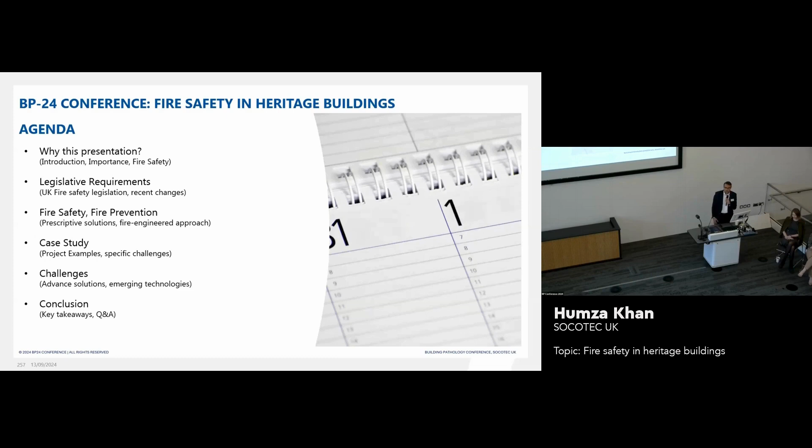So today's presentation is about fire safety in heritage buildings, the importance of these buildings in our socio-economic environment, the legislative requirements of the UK government, and how we meet those legislative requirements based on the recommendations of the fire safety guidance. And then I will present some case studies where our fire engineering team faced some challenges and how we came up with unconventional methods of achieving the objectives of fire safety, what are the usual challenges in implementation of the fire strategy in a real life building, and the conclusion, key takeaways from this presentation.

Heritage buildings are not just buildings made up of brick or stones, but they carry an immense cultural and heritage value because of the history they have been through. Especially in the UK, these buildings are not only museums or castles, but they are playing an immense role in the country's national infrastructure, consisting of universities, theatre buildings, council buildings, and everything else.

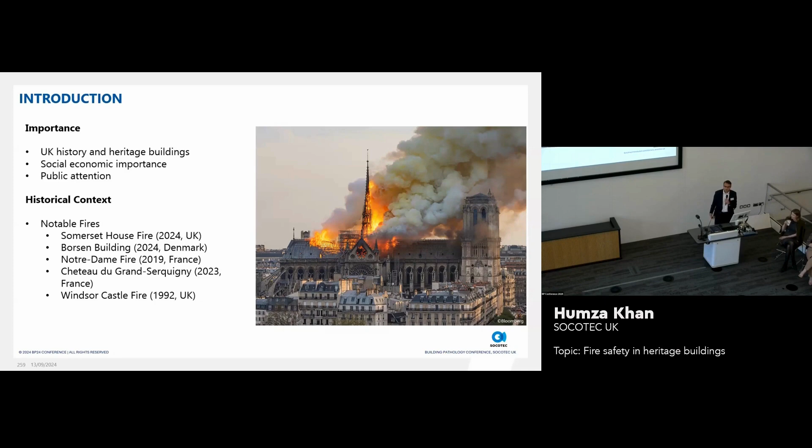But we have seen in the history that these buildings are more vulnerable to fire as compared to new build structures. For example, last month's fire in Somerset House in London, the Borsen building fire earlier this year, and the Notre Dame fire we are all aware about. But there are some fires that go unnoticed in these buildings.

So the definition of a heritage building is that it is a cultural or historical structure of immense architectural or cultural value, which is legally protected under Section 1 of the Planning Act 1990. And the National Heritage List for England mentions that there are more than 370,000 entries for listed buildings categorized into three categories based on their importance: exceptional interest, special interest, and more than special interest.

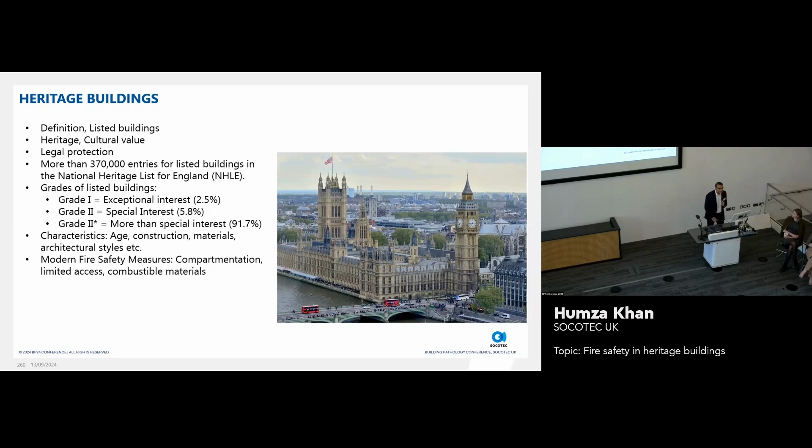All these structures have unique characteristics such as the age, construction, the materials they are made up of, and the architectural style, which is not always easy to comply with the modern fire safety methods of compartmentation, the limitations on the means of access, and the limitations on the combustibility of materials.

So we have talked a lot about the new legislations and regulations on fire safety. But I will just talk about the primary ones, which are the Building Act 1984 and the secondary legislation, which translates into the building regulations. And in order to meet the requirements of these regulations, we take guidance from the prescriptive standards, such as British Standards or Approved Documents. However, these guidance documents get updated only once or twice in a decade.

So there are some special interest groups, such as in the Institution of Fire Engineers, who come up with more up-to-date guidance on these structures.

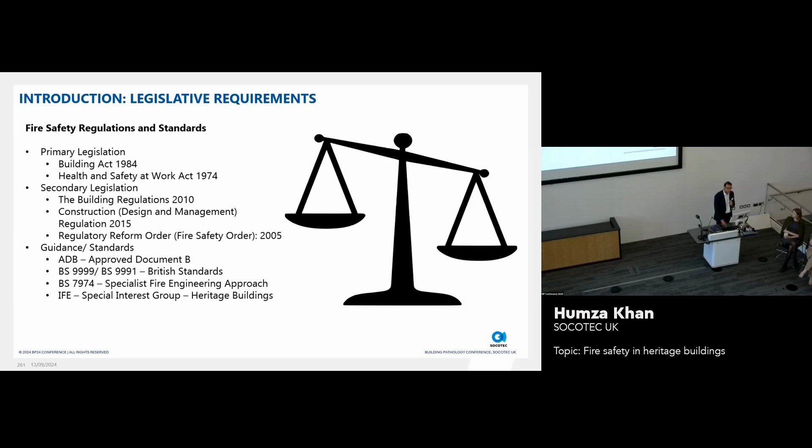Fire safety in heritage buildings is of critical importance because the design of these buildings has some inherent risks, such as the building fabric could be made up of combustible materials, the presence of chimneys, or the wooden panelling or textiles within these structures, which are not easy to remove. So we would lose compliance with the definition of sustainability, which is that we have to pass on these structures to our future generation as we have received them from our ancestors.

There could be electrical systems from the previous century which could be outdated, and extensive cavities, presenting a risk of fire through these structures. The existing design may not always comply with the compartmentation and the requirements for the structural elements. The lack of ventilation system: they do have ventilation systems in older and historical buildings, but not like the smoke ventilation systems we propose in newer builds. The limitations on travel distances and the access for firefighters to go into the building and fight fire in the event it happens.

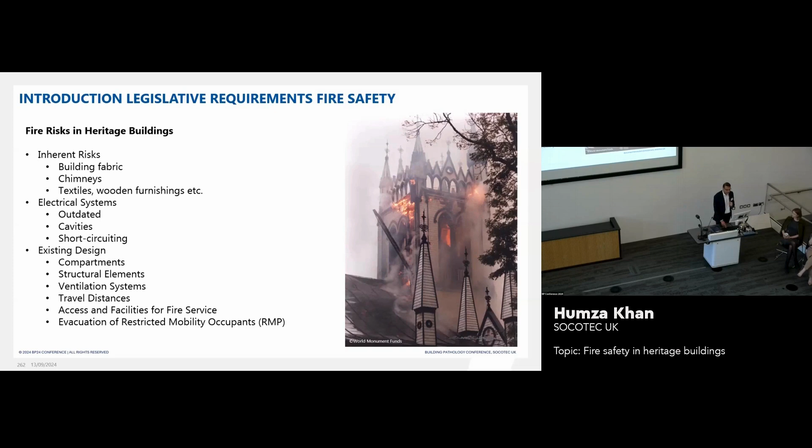When we look at the fire strategy of these buildings in our company, we always try to approach it comprehensively through the similar methods like we do it in a new build, for example, defining the occupancy of the building and how to limit the use of different spaces.

We do have recommendations for the active and passive fire safety measures, which could be the fire detection and alarm system in order to alert people who are in the building, and the ventilation, the fire separation of different areas, the fire doors, which are of critical importance.

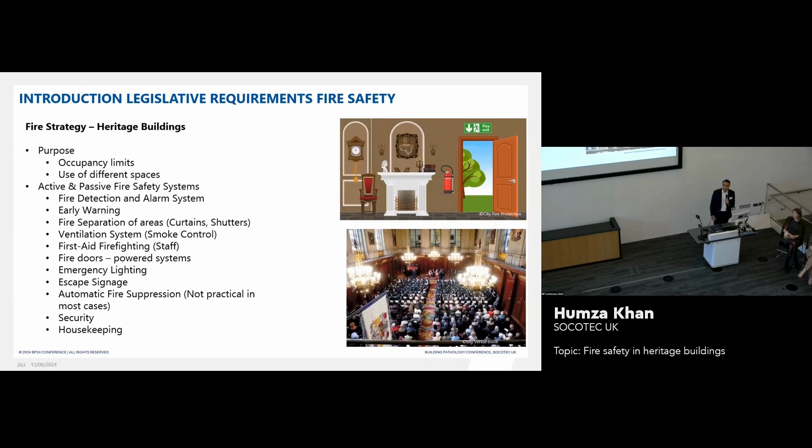The installation of automatic fire suppression systems is easier in the new build, but not in the existing ones, so not always practical to achieve. And if it's a communal building, then there are some measures for the security and housekeeping.

The critical thing about means of escape is that all the occupants in the building need to feel safe in an event of fire, and they can make an escape without getting stuck in the building. So we do mention the travel distances and exit capacity as we do in the new structures, but there are some limitations. So we'll talk about them later.

With the introduction of London Plan Policy 2021, there is a criteria for inclusive design, which mentions that all the people with reduced mobility should be able to evacuate without feeling differentiated from the other occupants of the building. So that is something to look for in these structures. The Access for All scheme in heritage railway structures, this is something to look into and implement in the fire strategy.

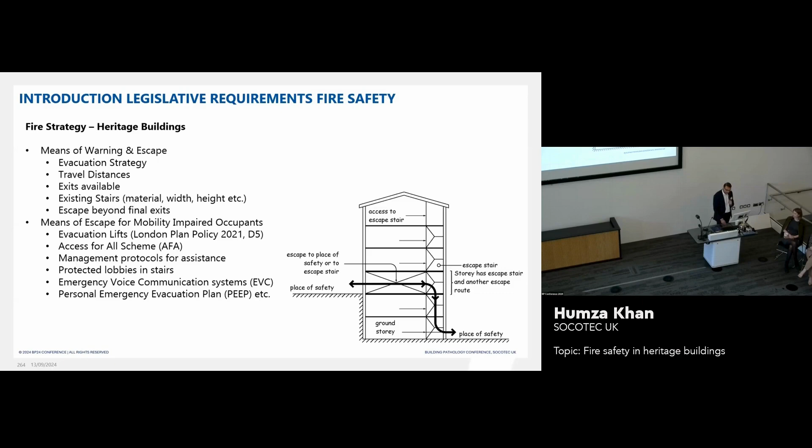So we have a limitation on the internal fire spread, limitation on the internal linings of the building, because the delicate structures and the materials of the building may not always be easy to replace, because they carry a cultural and heritage value. Similarly, the structural elements like columns or beams might have architectural features that are not easy to replace.

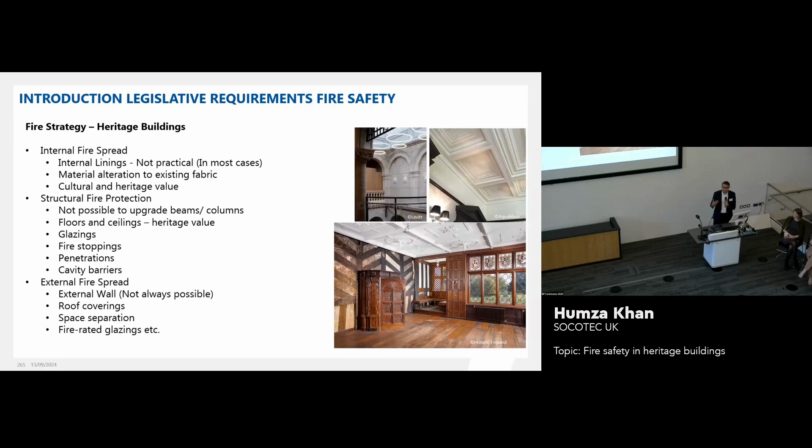The limitations on external fire spread: we have often found that these buildings are located in the congested urban environment, and there are limitations on the space separation between different buildings, which the modern fire safety guidance does mention and put some restrictions, but in the heritage buildings, it's not always easy to achieve.

So for example, the use of water for fighting a fire within these buildings is not always practical, because it will damage the internal fabric of the building and may not always be helpful in the firefighting methods.

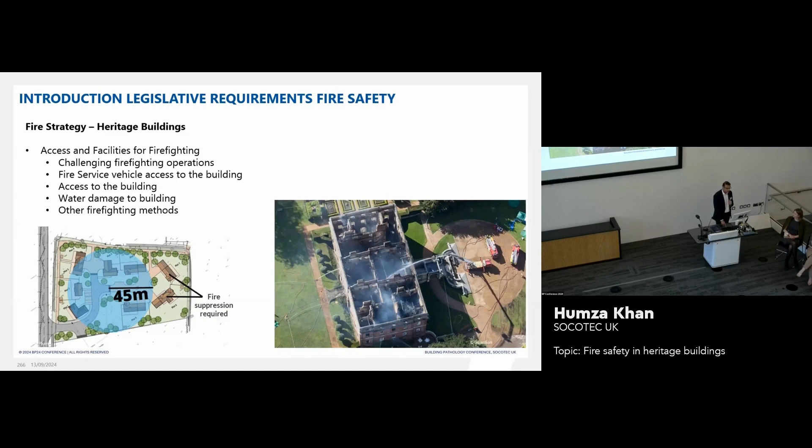So I will start with the first case study where SOCOTEC Fire Engineering team worked on the Theatre Royal at Drury Lane in London. It is a Grade 1 listed theatre building, operational since 1812, a 6-storey building with a basement, and it has a back of house office accommodation, which the client wanted to convert into a restaurant space which can accommodate around 300 to 400 occupants.

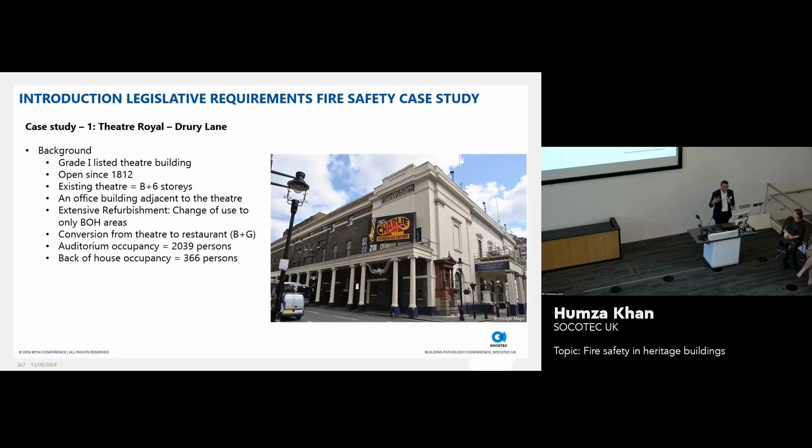So the total occupancy of the auditorium is itself about 2,000 people, and adding 300 more people into the back of the building is kind of a fire safety challenge to counter for.

And there were some unique challenges related with the fire detection, because the conventional fire detection was only based on the smoke detection, not always possible if there is some sort of a performance going on the stage which has smoke itself. Heat detection might not always be possible because there are some fireworks on the stage.

The width of the existing doors was not enough to accommodate all the occupants in a building like this. There were extended travel distances, and the 3 stairs which were providing access to all the upper galleries for the occupants were very close together and not lobby protected from the other areas. So we had to discount these and then calculate the overall occupancy of the building.

Now the fire doors over time were distorted, not fit for their function, and there were no firefighting shafts or smoke ventilation in the basement.

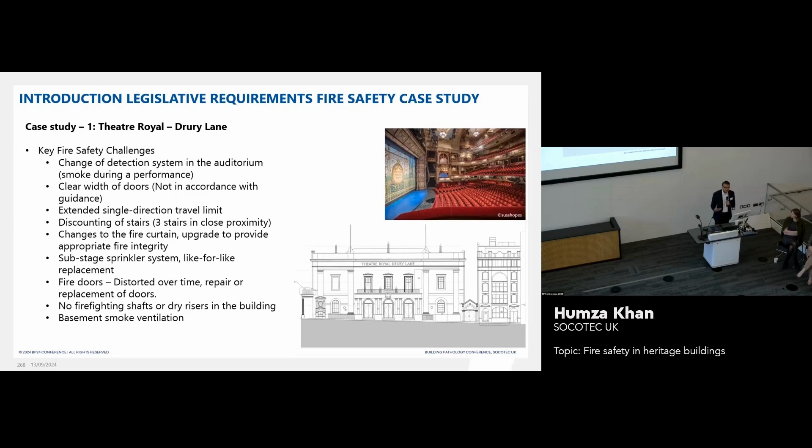Now, a very similar structure, a theatre building called the Iroquois Theater, was burned down in the US in around 1903, which had the occupancy of almost 2,000 occupants. And during the fire, almost 600 people died. So just not to repeat the same outcome of history, we had to implement unique fire safety methods.

So our key recommendation was, first of all, to upgrade the fire detection system, introduce a multi-criteria detection, which not only looks at the smoke or heat, but also at the flame and the growth of fire within a specific period of time. The extended travel distances were justified based on the increased height of the ceiling. The discounting of stairs could not be made better, but we did not make it worse than the existing condition.

Lobby protection was recommended and achieved in the back of house and auditorium areas. Refuge points were introduced. The existing structural fire resistance was unknown because of a lack of design documentation on this structure, but according to the new guidance requirement, the structure should be able to achieve 60 minutes of fire rating in the event of fire.

So the basement without smoke ventilation was proposed to provide more compartmentation so that the fire remains within the basement and does not spread throughout the structure.

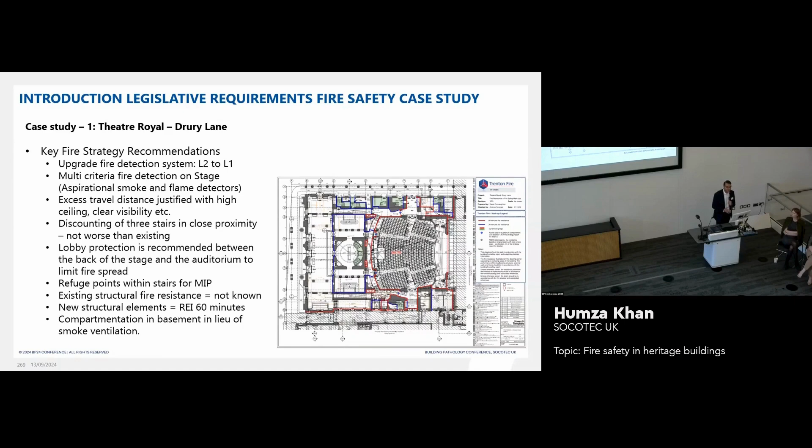The second case study is about Lancaster Gate in London, which was proposed to be converted from a hotel use into a residential development. The number of dwellings in this building was going to be reduced, and Regulation 5 of the building regulations mentions that even with reducing the number of flats or dwellings, it comes under the material change of use definition, and the whole building needs to achieve the highest possible standard of fire safety,

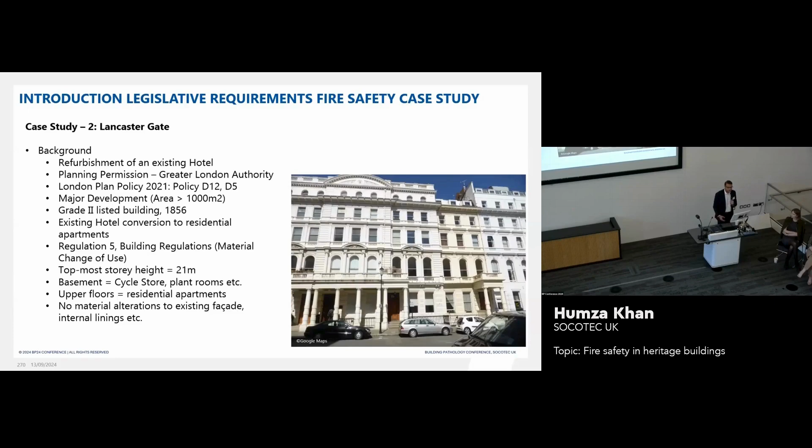as also mentioned in London Plan Policy 2021. The topmost story was 21 meters, more than 11 meters, so we had to introduce sprinklers in the building. The basement was reserved for the plant rooms and cycle stores, which were not lobby protected in this case and had to be separated from the stairs, so that in the event of a fire, which could be due to negligence or arson, the smoke does not go into the stairs and leave all the building occupants in their apartments. The main objective was also to keep the facade of the building untouched. So that was the limitation.

The key fire safety challenges, as mentioned, were the inclusive design and the presence of no evacuation lift. We had to introduce an evacuation lift within the building, and the automatic fire detection system was upgraded so that all the occupants can stay within their apartment in the event of fire. The introduction of a lobby between the stair core and the cycle store was done in this project.

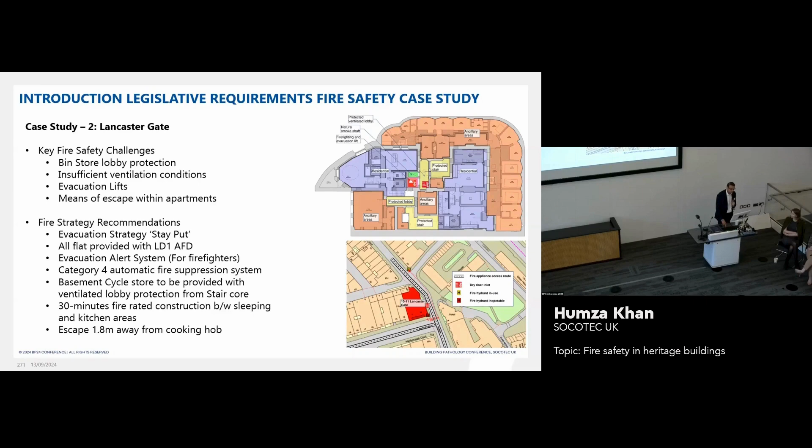The third and last case study is about 84 Moorgate in London. It's called Electra House, and the proposal was to convert this building from a university accommodation into an office accommodation. It had an unconventional layout, a very massive building with 2 basement stories, and the height of the occupied floor was almost 26 meters. There were excess travel distances, and the stairs were all serving the basement, which would not be possible in a new build structure.

However, this was a heritage structure, so we had to adapt and not make the existing conditions worse. No firefighting shafts or dry risers were present, but there was a proposal for the introduction of an openable vent within the central stair, so that in the event of fire, the smoke that goes into the stair can go out of the building through the window or vents.

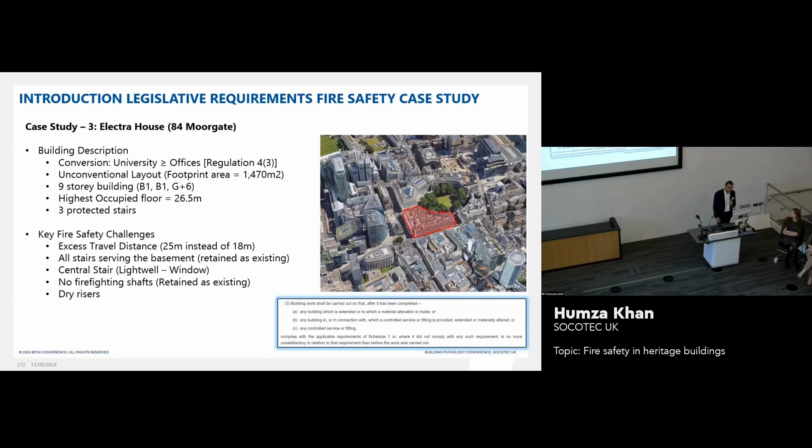So these are the challenges to fire safety and fire strategy development, but there are some challenges during the implementation of these recommendations. For example, we have 2 conflicting objectives here. First, we want to preserve the building and its existing features. And the second objective is that we want to make sure that everyone who is in the building is safe and can get out in the event of fire. So we have to go for a balanced approach.

There's also a conflicting interest between the funding and the resources. If an existing building is taking so much resources, economic backing, and money for regular maintenance, then wouldn't it be more useful to build a new structure with state-of-the-art fire safety systems? And then there are some construction complexities with the methods of construction, the damage during construction, and the specific skill set required to restore these buildings, which is, of course, not always the cheapest possible option.

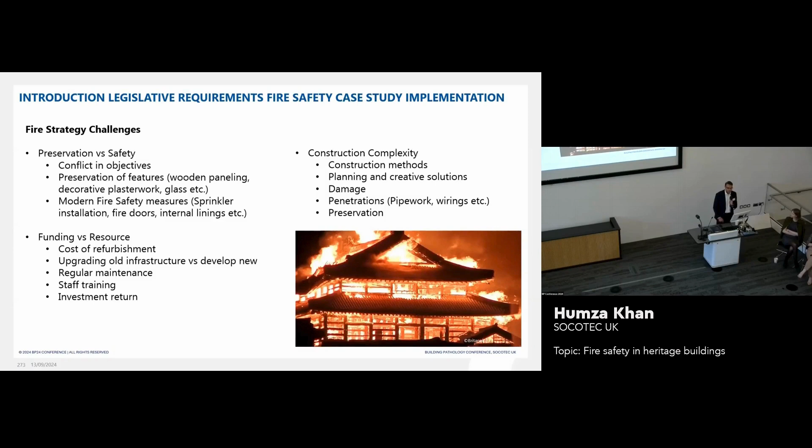However, there are some future directions and innovations, emerging technologies that could be helpful in improving the fire safety of these buildings. For example, comprehensive building information models with additional layers of detail for the fire engineers to work on and collaborate with different departments so that the overall fire safety could be improved.

The real-time monitoring of the information present within the building and feeding this into online systems so that we can look at the data retrospectively to find out what factors are contributing to the fire safety of these buildings, and maybe further research around thermal imaging for the location and identification of hotspots within the building where the fire load is, and how we can fight the fire in case it happens, not just with water, but with some innovative methods of extinguishing it.

There could be invisible coatings applied to the existing features so that they are not very combustible and not at high risk of catching fire.

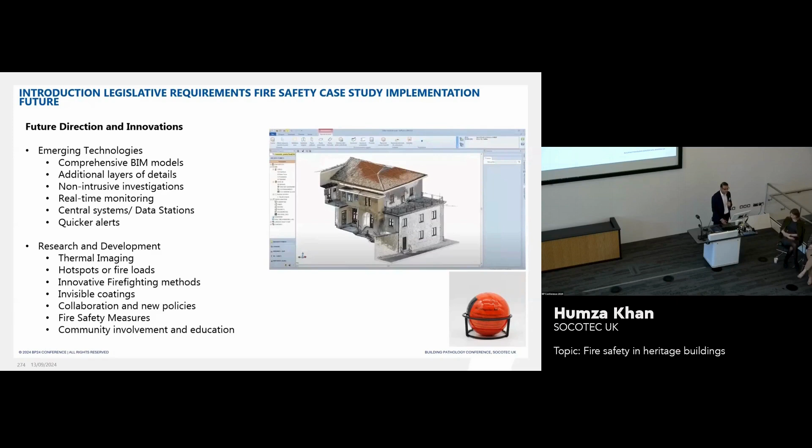And of course, there is a need for collaboration and new policies that need to be developed for the safety of these buildings, and a need for community involvement and education among all stakeholders to achieve the fire safety objectives.

So the conclusion and key takeaways from this presentation is that we have to go for a balanced approach between preservation and fire safety, because these are not just structures, they carry immense cultural and heritage value. We have to comply with the regulatory framework, the legal requirements in these structures, and ensure that the public using these buildings is safe.

The fire safety challenges are comprehensive and sensitive, and our objective is to not make them worse than existing, and to pass these structures to our future generations as we received them from our past.

Socioeconomic challenges related to funding and revenue, the complexity of construction, and the need for all stakeholders to sit together and find a solution to meet the objectives of fire safety in these buildings.

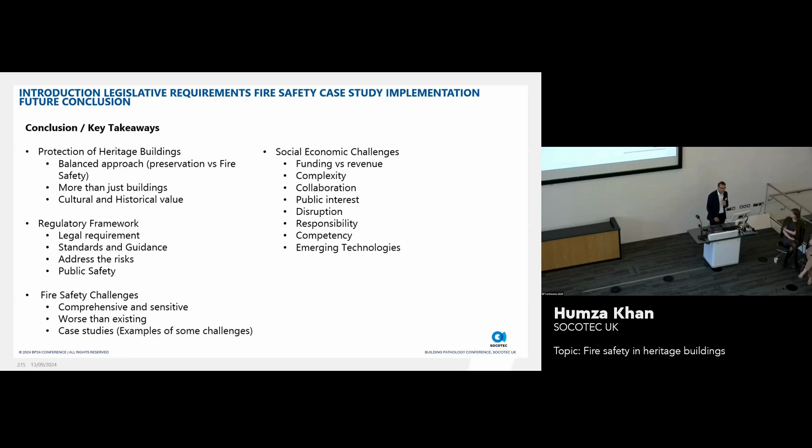The disruption of services, what is in the public interest, whether to spend so much money on restoration of these structures, and of course there is a requirement for responsibility and competency. This can be sorted out with the help of innovation and emerging technologies in the future.

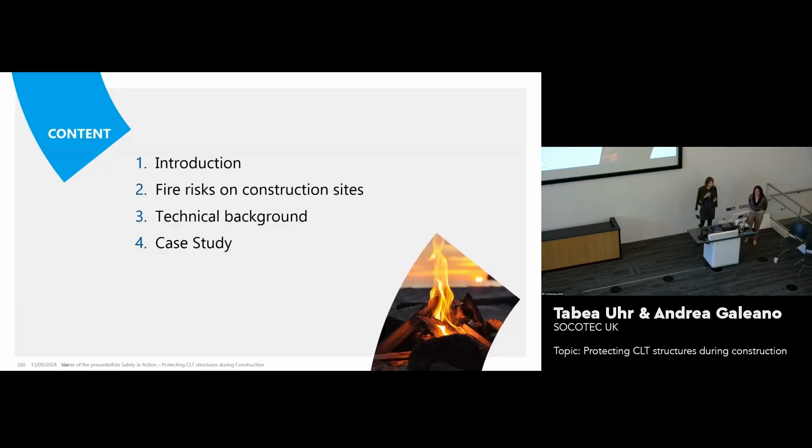So looking at the introduction, I hope everyone now understands from Humza's presentation that with fire safety engineering specifically, we're looking at the prevention, the control, and the management of fires. That means specifically the safeguarding of life, but also property protection, business continuity, and the impact of all of that.

And then obviously during the construction site, we're focusing specifically on that maybe 1, 2, but also maybe 10-year gap for when the building is being developed.

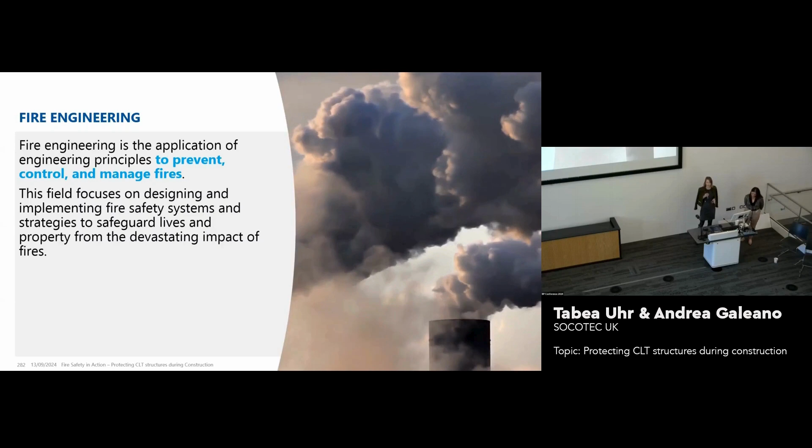Now, obviously, we heard that before - the current construction industry is a very high percentage of the pollution that is currently generated. I found a number of about 37%. You guys might know better than me if that's roughly correct, but let's go with about a third of the global emissions originate from construction and the build industry.

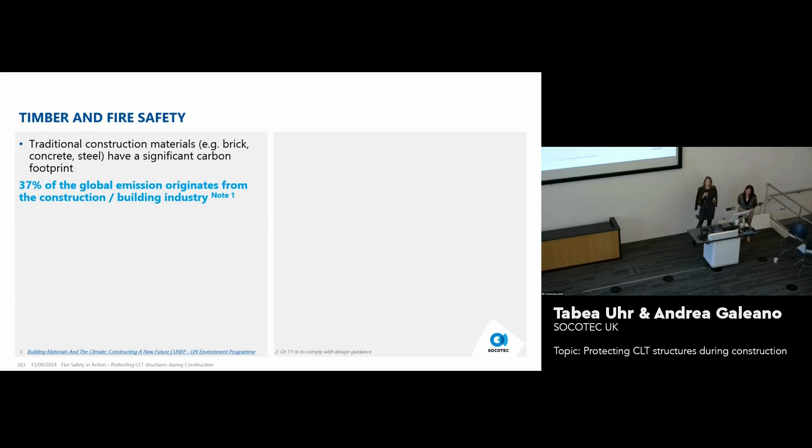So looking at CLT and timber construction as a renewable construction material is a very good way that we as an industry want to go. And especially when you combine these with modular structures or prefabrication, you can very efficiently start to build your buildings.

But looking at it from a fire safety point of view, your timber, your CLT is a combustible material. It's going to participate in your fire event and make that worse. We need to comply with the specifications that Humza explained just now.

We're looking at linings, the structural fire resistance of timber, which will burn eventually, and its combustibility. Picking up from an earlier presentation about the Grenfell Tower fire, we're still picking this up, the results and impacts of this fire where 72 people died. We're still working on this.

One of the biggest impacts the inquiry had on our industry was the removal of all combustible materials from the facade of residential buildings over 18 meters. It's a huge impact for us because now when we want to build with CLT and timber and we want to move there, this is a big limitation for us in England and not something we can move or overcome at the moment, given the impact that Grenfell had on us.

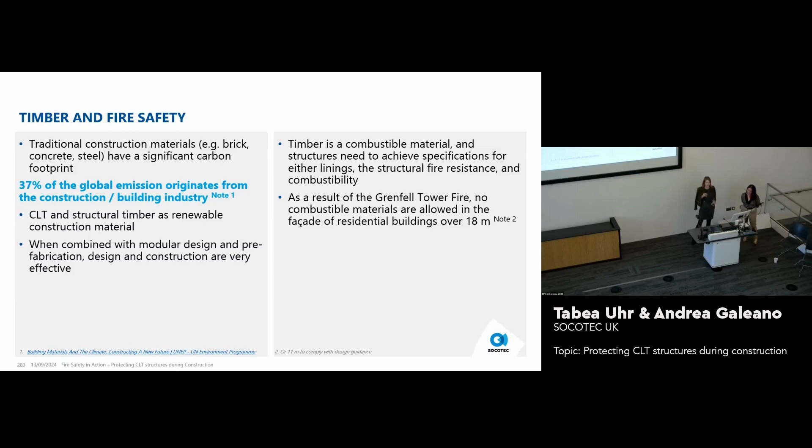So as an industry we're now heading more towards low and mid-rise non-residential buildings where those limitations are not in place, and now looking to use structural timber and CLT in these sort of buildings.

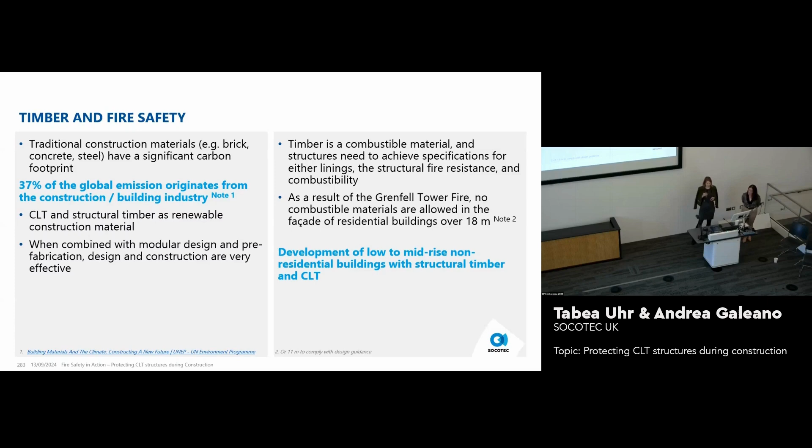They also looked at water mist, so a water mist suppression system that would create a voluminous mist throughout the building to then suppress the fire.

What they found in this fire test specifically was that there's a lot of radiation happening between your combustible materials, so your chairs, your tables, etc., and then your CLT ceilings, kind of radiating and propagating that fire spread throughout your compartment, especially when you have very large compartments.

But they also found that even just a partial encapsulation with protective materials such as a plasterboard, a cement board, or these type of things can significantly slow the spread of fire. Water mist systems or other suppression systems as well help with cooling, extinguishing, and these type of effects. So the problem now that we face on our construction sites is partial encapsulation, full encapsulation, water mist systems.

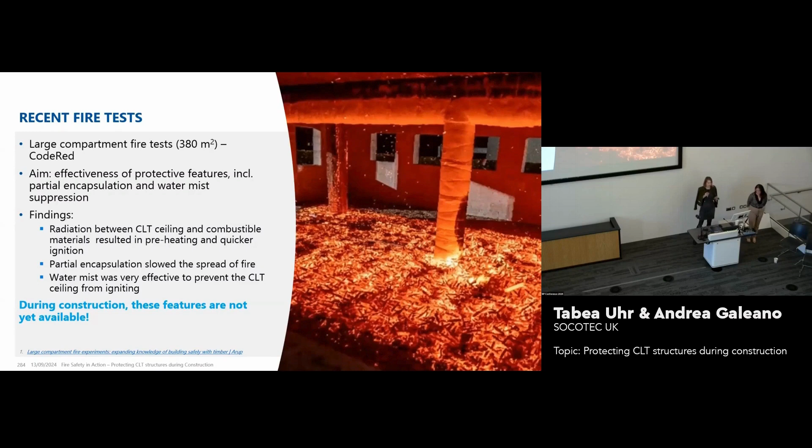We're just about to build them. They're not here yet. So in most cases, we're looking at unprotected timber. We're not here yet. And some of those risks will now be explained by Andrea.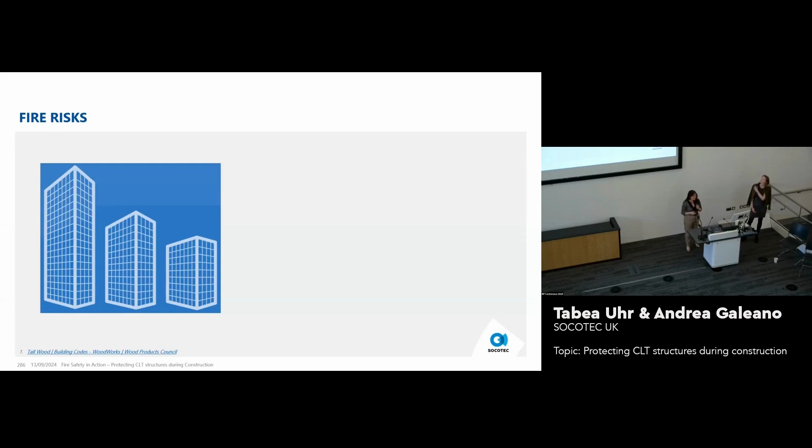But of course, the fire safety measures that we need to consider when preparing the fire safety strategy will depend on the building height, the building complexity, and all the design fire risk that we have on site, specific to that project. And as Tabea was saying before, because the building is just being constructed, we don't have any of the passive or active fire safety measures that the final design will have.

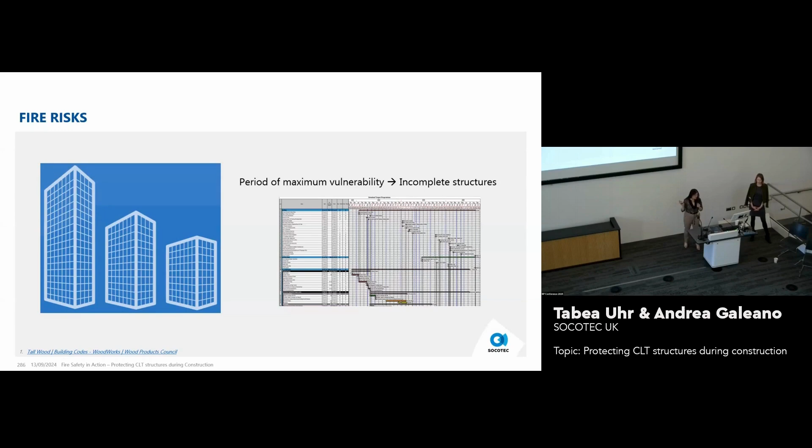So we will not have compartment walls achieving any sort of fire rating. We will not have a suppression system. And of course, this represents that during the construction stage, our building will be in its period of maximum vulnerability.

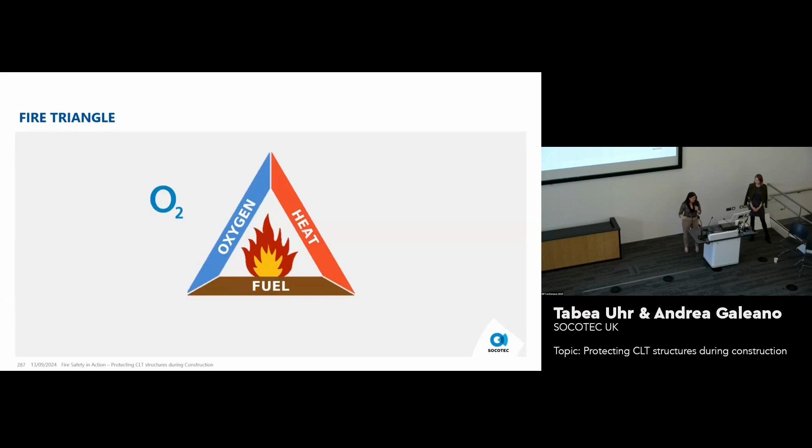So going just like Fire 101, the basics. For a fire to start, we need 4 elements. First of all, we need the oxygen, so that is going to sustain, support the combustion. We need as well the fuel sources, we need the heat sources, and we need the chemical chain reaction to sustain the combustion process.

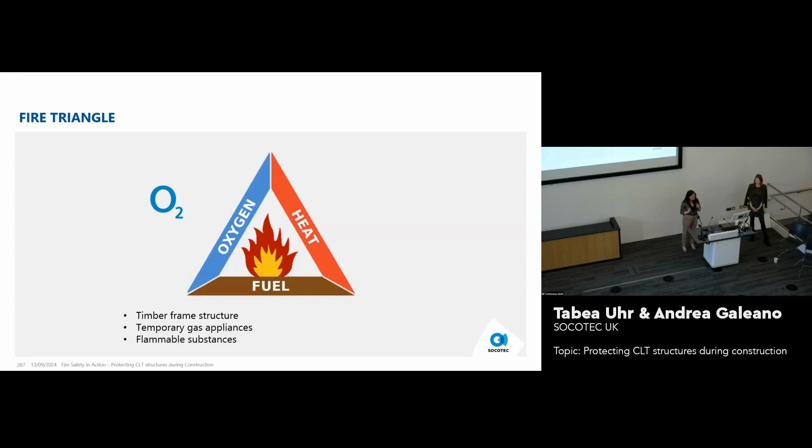So when we start thinking about fuel sources on a construction site, we have, first of all, the structure. If we're speaking about CLT or timber frame structures, temporary gas appliances, flammable substances, combustible materials, waste.

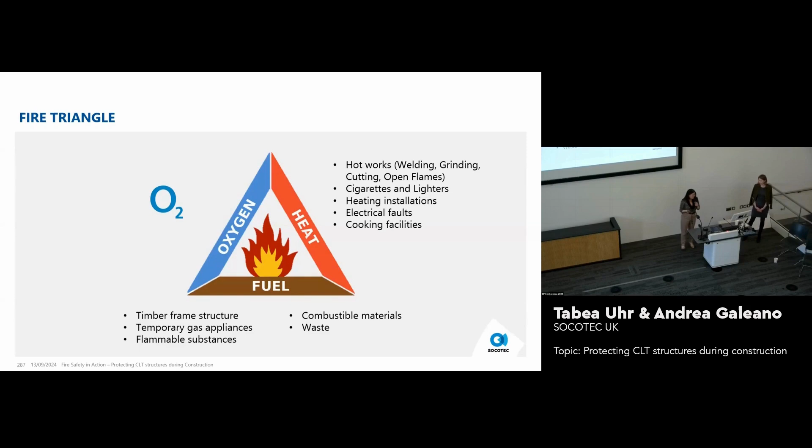And when we speak about heat sources, we typically have hot works, cigarettes and lighters because people are smoking on site, heating installations, electrical faults that due to lack of maintenance or misuse can lead to fires. And of course, cooking facilities, because typically construction sites have a canteen provided for the employees. And in these facilities, it can end up in an oil fire.

So in the previous slide, we saw typical heat sources, fuel sources that we have on a construction site. For us, that's identifying the risk.

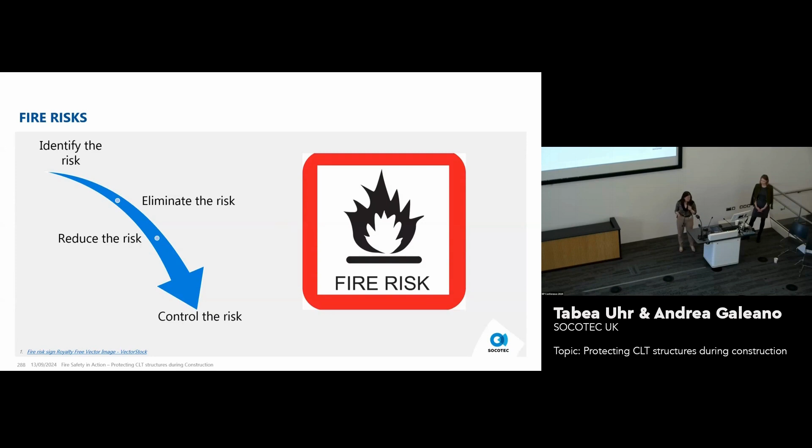Those are our risks that we have on site. So first of all, we need to try to eliminate those risks. If we can't, then we need to move to reduce the risk. And of course, then try to control it.

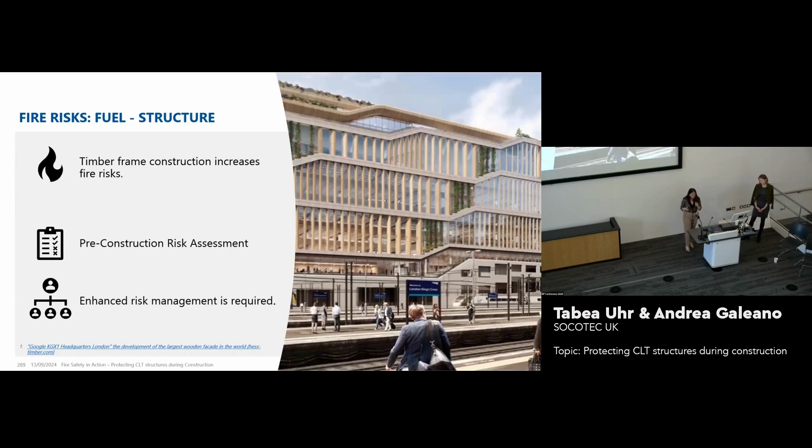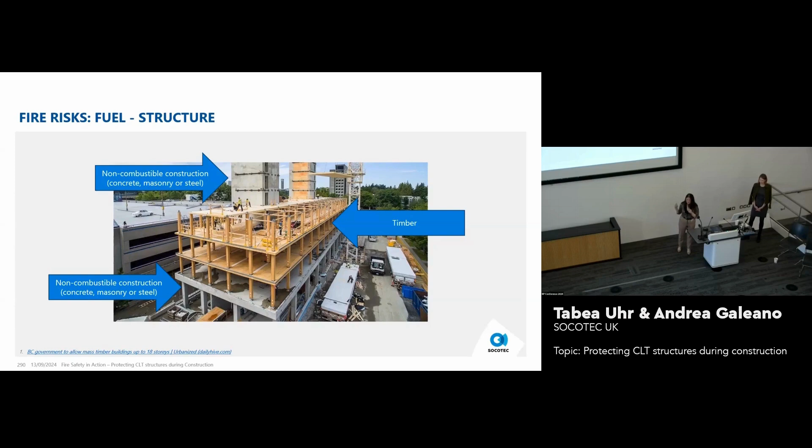Starting with the first one, the structure. If it's a timber frame or CLT, this is going to increase the fire risk, and this is not something we can eliminate on a construction site because it was defined in the design. So we need to find an alternative to reduce deliberate or accidental fires on site. Some measures that can be considered are providing non-combustible construction materials on the lower levels, and then timber on all the upper levels. Typically the main cores, where you find the protected stairs, are also enclosed in non-combustible construction.

Then in regards with storage of combustible materials or waste, the first step is always related to identifying the risk. We need to assess the site for all the areas where combustible materials are stored. When it's related to waste, this is something that can be managed on a daily basis, removed at the end of every shift. This is one of the measures to eliminate the fire risk of having a lot of waste accumulating throughout the day on site.

And then in regards with storage, this is something for the site manager to control, in order to reduce or minimize the amount of combustible construction materials that are going to be stored at the same time.

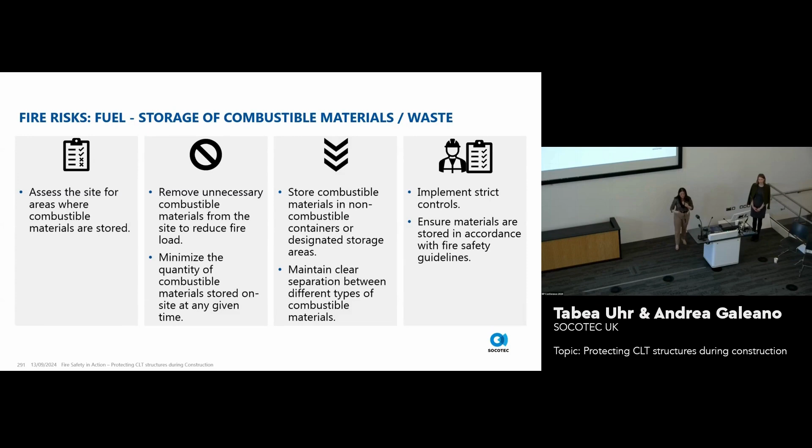Then, in order to reduce this risk, one of the measures is to store any combustible material in non-combustible containers or designated storage areas, or in areas enclosed with at least 30 minutes fire rating, and provide heat detection systems as well. Of course, try to keep a separation between the storage or waste areas, a specific amount of meters from the site or any other ignition source. This needs to be strictly implemented, ensuring all materials stored are kept in accordance with the construction fire safety strategy.

One of the highest causes of fires is actually hot works, and it tends to happen in construction, new buildings, refurbished buildings, any type of building. That's why it's always important to assess, and the contractor needs to know this is a really, really high fire risk. So trying to eliminate that means removing all hot works from site, but we know this is not really easy to achieve on a daily basis.

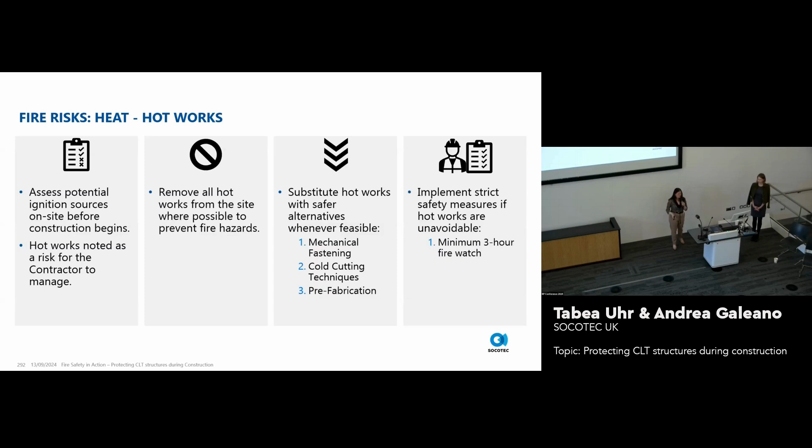So sometimes we can substitute these hot works with safer alternatives, such as mechanical fastening or cold cutting techniques. If this is not feasible, then you will need to do the hot works in a designated area, following control measures such as a minimum 3 hours fire watch or the use of thermal cameras.

Then another fire risk is smoking. Again, for the contractor to manage, assess the potential ignition source. We can implement a non-smoking policy across the construction site.

And this can work on a red card system, similar to football players—if they commit a fault, they get the red card and need to leave the field. For a construction worker, if you get a red card, you're removed from site for that day, and if it's repetitive, eventually you will get fired.

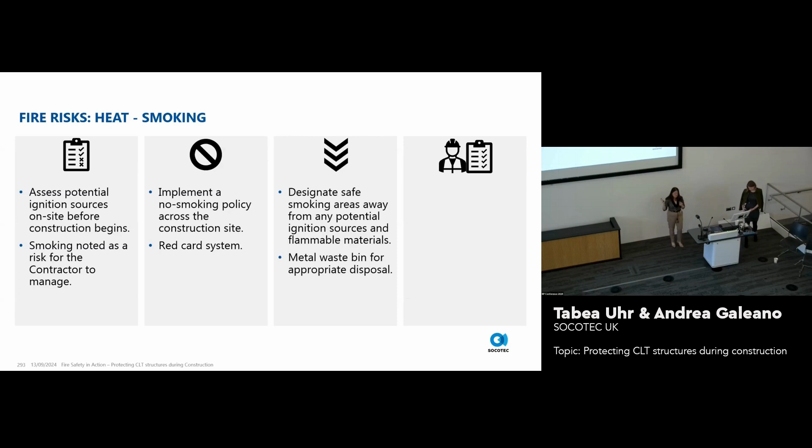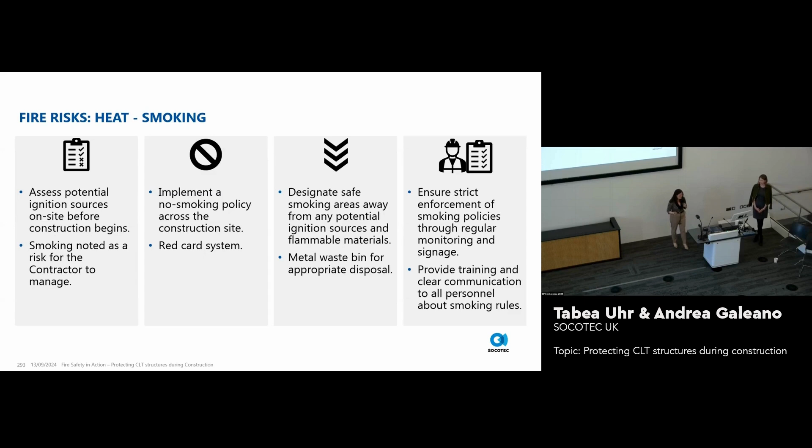People will always smoke—you will always find someone who is going to smoke. So typically on construction sites, there is an area assigned as a smoking area that is properly designated and has proper signage. It is away from all ignition sources and flammable materials, and there is always a metal waste bin for appropriate disposal of the cigarette butt. This is really important for management to control and to provide training to all personnel, because it's important for them to know this can occasion a fire risk.

Now I'm going to talk about two more risks that might be present on your construction site, which are slightly more different. First one is typical building features, specifically atria, because with the large space in your building, fire and smoke can easily propagate throughout your construction site unhindered.

So what we do for these types of buildings is place compartmentation, fire resisting structure, in strategic locations to limit the space and area where fire and smoke can spread. Reduction measures include a clever look at the construction program and scheduling, implementing features like compartmentation lines at key dates to reduce the impact a fire spreading through a large common space could have.

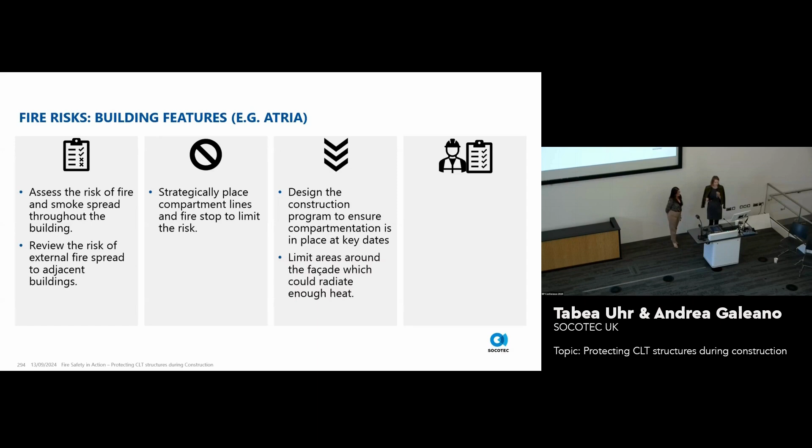We also need to look at prevention of external fire spread. With large spaces, a lot of heat radiates to adjacent buildings, and we don't want to set our neighbors on fire, so we need to provide areas with very limited amounts of combustible materials. Where our structure is combustible due to CLT or timber, we need to be especially careful, maybe even considering additional safeguarding features like temporary protection measures, such as temporary plasterboard.

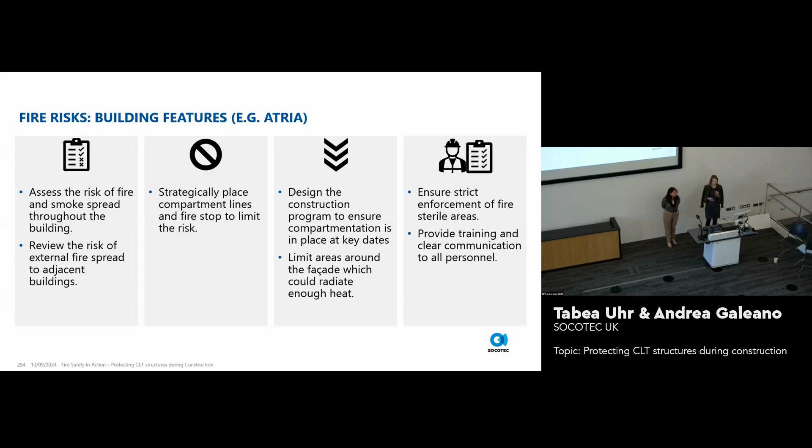And again, as always, it's for the contractor to enforce these kinds of restrictions explicitly on site, make sure they're adhered to, as well as always ensuring communication and training for all of the personnel.

A second feature which might be of interest to our colleague from earlier, who would like to talk about dust. We also like to talk about dust on construction sites because it's a very common occurrence, and as much as you don't think it relates to fire, it kind of does, because it's fine particles that can propagate fire growth, but there are also some minor explosion risks as well.

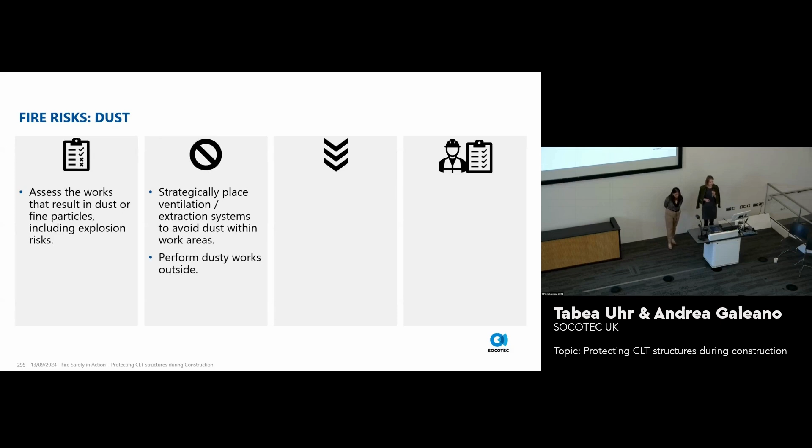What we tend to recommend as the fire engineer on construction projects is to say, well, just extract it, please, avoid having dusty areas, keep it clean, or do it outside, because when you don't, you're actually going to set off your smoke detectors.

The smoke detectors we put in to safeguard the site are set off by your dust. So instead of smoke detectors, we tend to place heat detectors on site to avoid these types of things and to avoid false alarms, because once people get used to having false alarms, they will either cover up the detectors or just ignore it. And once there is an actual fire event, that's not very good for us.

So make sure that procedures are adhered to and work areas are kept clean. And again, don't cover up your detectors, please.

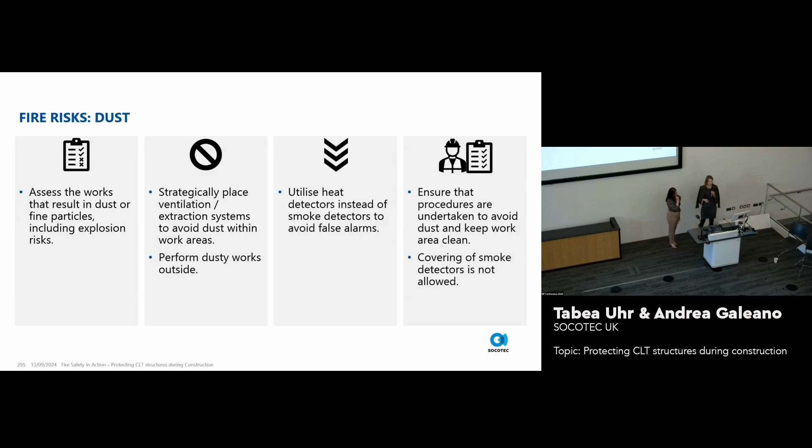So now looking at the technical background, back to Andrea.

Okay, so how do we know which measures we need to consider in a construction fire safety strategy? There are three main documents that we need to follow. First of all, we have the HSG 168.

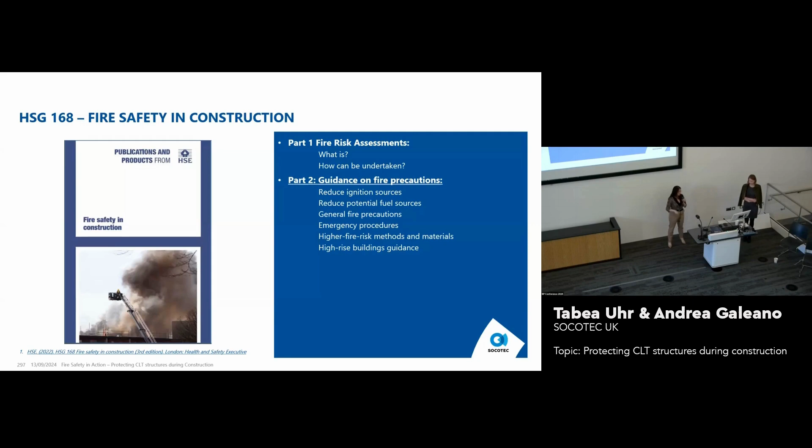It was developed by the Health and Safety Executive, and it is enforced by them as well. This is a mandatory document enforced also by UK law, and most of the document gives us information about the fire risk assessment, everything we discussed previously - fire risk, how to identify it, how to control it, how to eliminate it, the measures we need to consider, and a little more general information.

And then we have the Joint Code of Practice, which we call JCOP. This is opposite to the other guidance document - this one is a voluntary code. It was developed by the Fire Protection Association in conjunction with the construction group, and it mainly gives us fire safety measures we need to consider on site in order to comply with insurance company requirements. So when we work with this document and the HSG, we kind of complement our work.

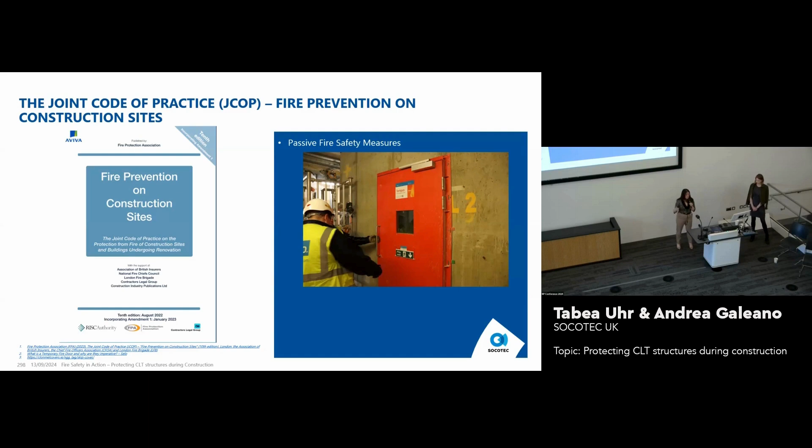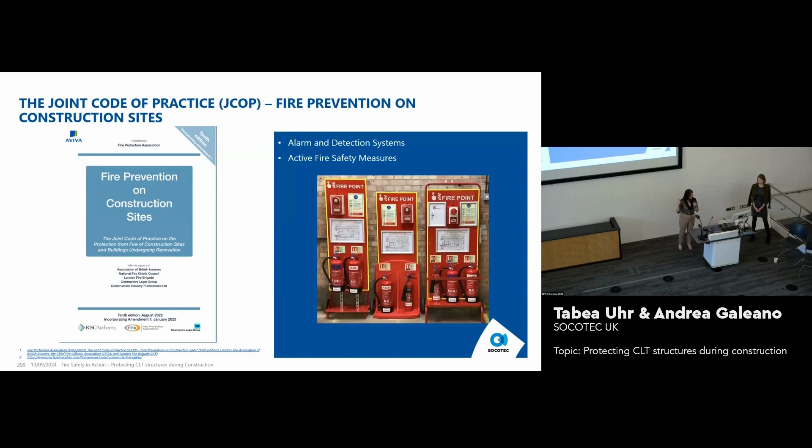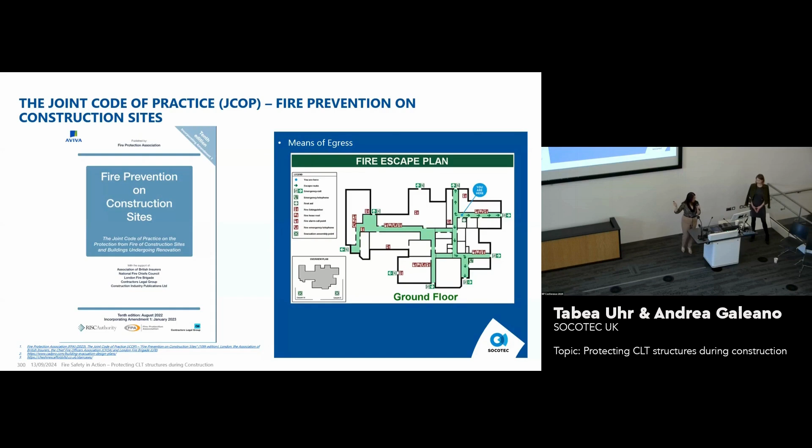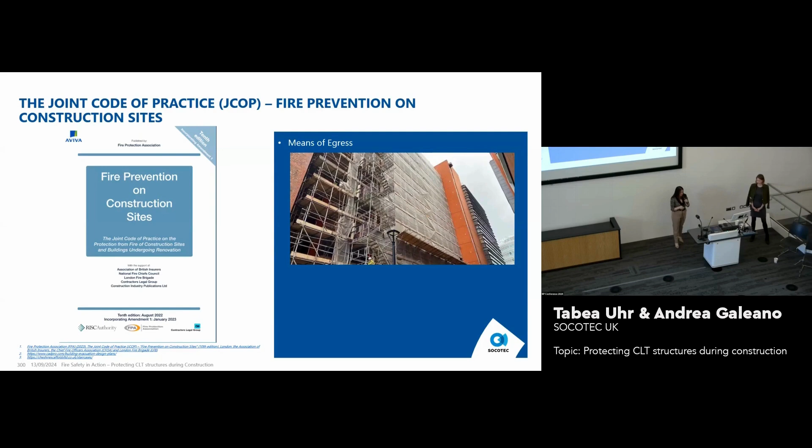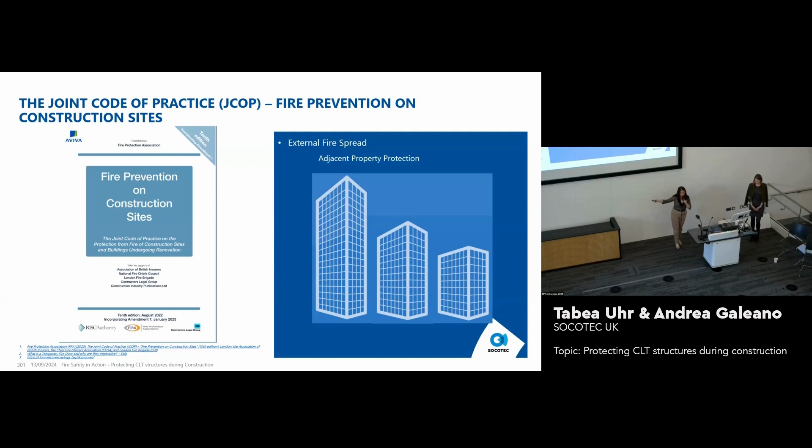And what we want to avoid is the fire from spreading to them.

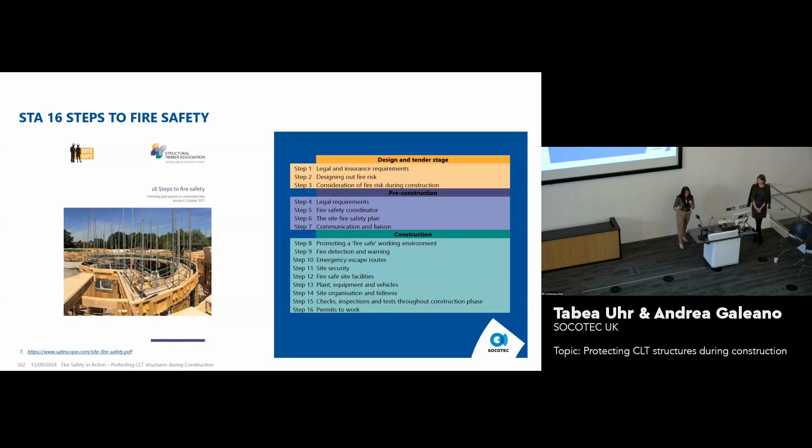And then we go with the case study. Yes, so now we're looking at one of the projects that is currently post-tender, pre-construction. It's a building in London, an 11-story office building, so pretty high rise for CLT timber structural timber.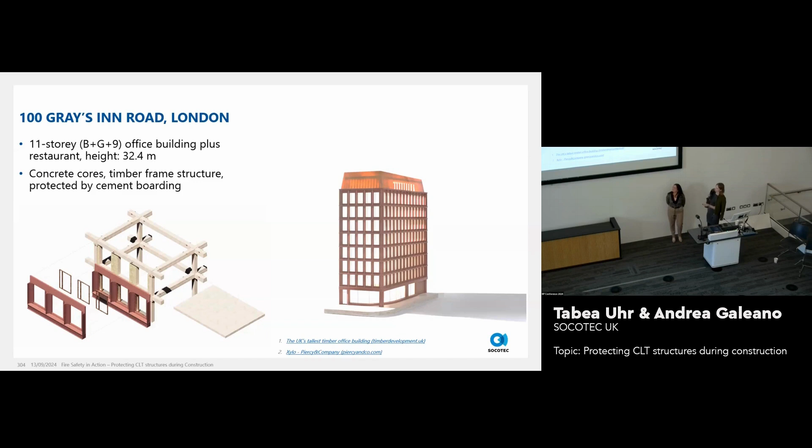We do have concrete cores, and then most of the structure, basically from ground upwards, is a timber frame structure that will eventually be protected by cement board. So we see here an excerpt of how that will look towards the end of the building.

As I said at the beginning of the talk, we do have that challenge in the construction period about our timber being unprotected. The cement board I just mentioned, which will be part of the fire protection measure once the building is constructed, is not yet provided, hence the timber is unprotected.

So from our point of view, we see that as an enormous risk and want to make sure that cement boarding goes on as soon as possible, because we have that fire load and need to mitigate it.

The problem, though, is that in the meantime, while that board is installed, we like to keep the facade open to prevent the fire from spreading within our construction site, but instead venting out of the construction site.

In that installation period, however, the problem is that if the timber is open to the outside, it will be wet, exposed to the elements, which is not a good idea before installing a cement board on top. That means we're back around in that cycle I was just discussing, which is obviously not particularly great.

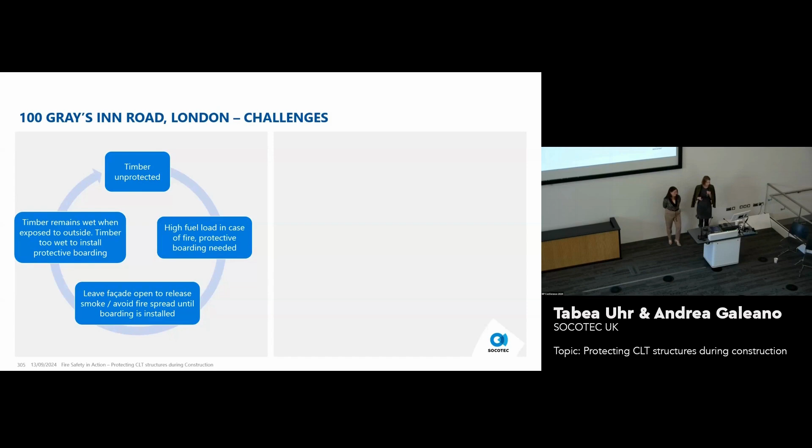So for this project, in the design and tender stage, we proposed a careful look at the construction process and planning ahead of time, ahead of the beginning of construction, of when we're going to place certain features.

For this one specifically, we looked at reduction of risk and ignition sources. As explained previously, we had a careful look at the compartmentation strategy, when to place certain compartment lines, and provided additional temporary compartment lines.

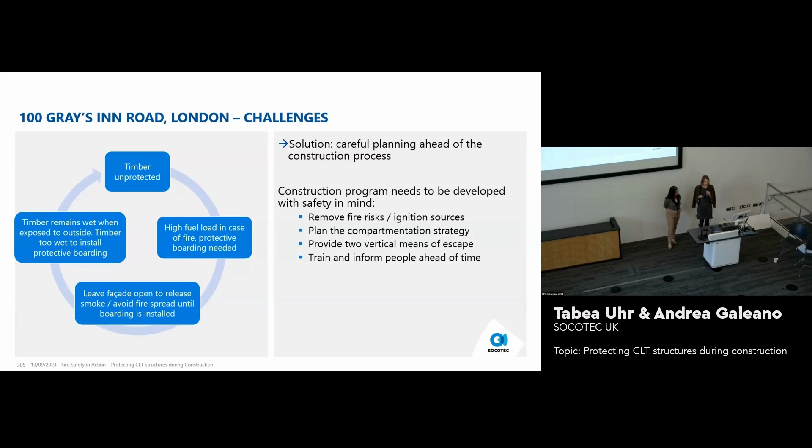We provided 2 means of escape from the building at all times, as well as a lot of training information currently being provided to the contractor and contracting staff to make sure they're all aware of those special risks. So this is how it currently looks for the design and tender stage, the application of these 16 steps of the STA.

For example, for this fairly high-rise timber frame building, we're going to provide CCTV linked to a response center, including thermal cameras to catch any hotspots left over from hot works. We're going to provide a watchman on site 24 hours, and have high fencing and intruder alerts to make sure the site is safe from arson.